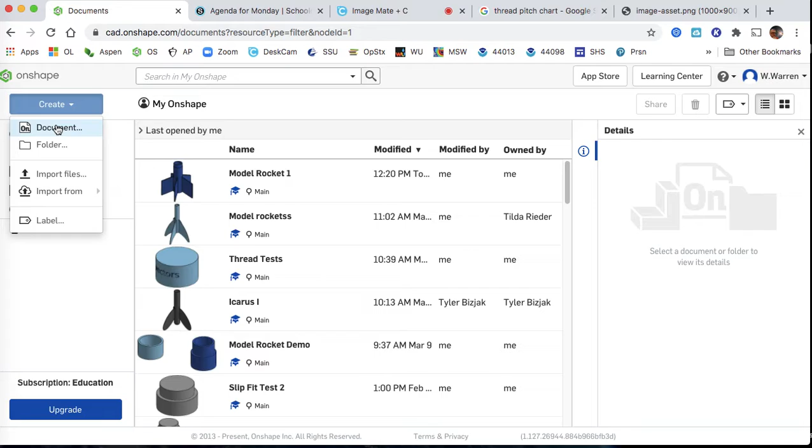Okay, so I'm going to call this nut and bolt. And I'm doing them really big because I really want to apply these threads to the inside of our rocket bodies so we can screw those motors into place. And I also want it to be big enough to print so I can check it. I just printed a really small one, and it was so small I'm not really convinced that the printer did a good job with the threads being so close together.

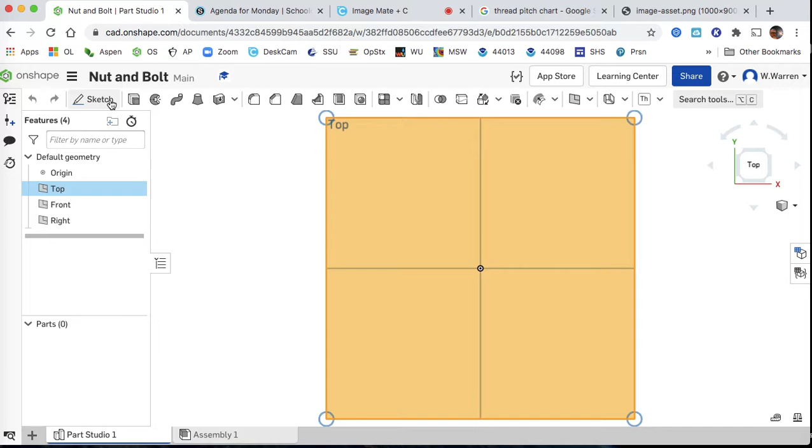Okay, so what do we do? Well, nuts and bolts, first and foremost, have tops that are hexagonal. They're 6-sided. So let's right off the bat start a sketch on our top plane and grab the inscribed polygon tool and draw a 6-sided polygon.

Now, our hole in the middle is going to be 1 inch. We better make this thing, gosh, why don't you just go ahead and make it 2 inches? Just make it nice and big, right? And oops, so get to 6 sides and click on it again. Grab your dimension tool, and from the top to the bottom, I want it to be 2 inches. Oh, I got pretty close by accident. 2. Okay. Now, there's our general shape.

Let's save that general shape, and let's extrude it. Let's see, it's 2 inches. I don't know, maybe I'll just come up 3/4 of an inch. I don't want to do a full inch. 1/2 inch. I'll do 3/4 of an inch. Extrude, I'll do an extrusion of 3/4 of an inch.

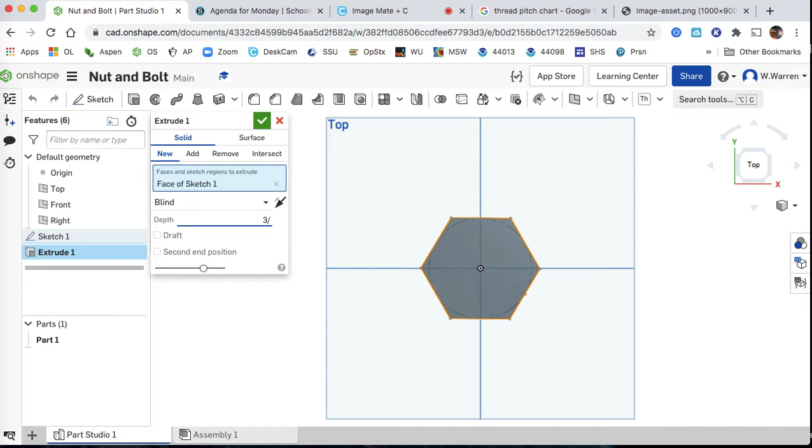And accept. Okay, there's the head of our bolt, right? And so, first and foremost, if you ever look closely at a bolt, they have this general shape, but they're not. They're all rounded at the edges because you don't want those corners cutting into stuff you screw into. Right, so let's take care of that by doing this.

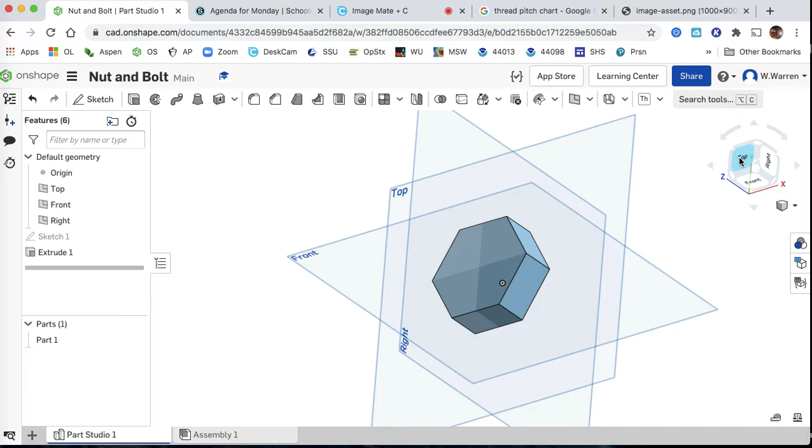Let's go sketch on this surface, and let's grab our circle tool, and let's do an inner circle. Just get it close to the outer diameter there, and then go to your tangent constraint and constrain that to be tangent with that. Make it the exact size. Okay, good. Another circle just has to be bigger than all the geometry, it doesn't really matter, just bigger, like that. And let's accept that.

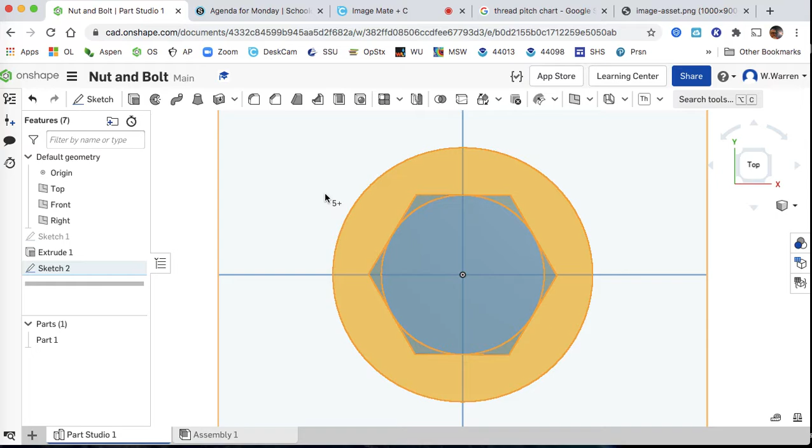Now watch this little trick here. If we zoom in and we select these areas, that little area, we can cut these at an angle. Just all these little funny shapes right here. And also choose the circle. Now watch this. You go to extrude and remove material.

You got to fiddle with it to get it right. Let's go to draft by some number of degrees. Like let's go 60. That's very common. Right? 60 degrees. I click outside of that so I can see what it looks like. It previews it for me. But if I do that cut now, it's going to cut 60 degrees in, and all I'm left with is that pyramidal shape there. So let's not do that.

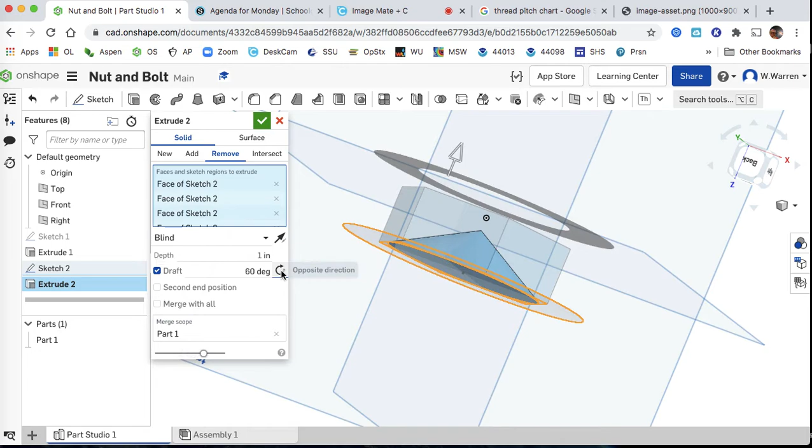Let's flip this around. That's what I'm after right there. See, I'm cutting at a 60-degree angle down across that face to the outer circle, to that distance, right? And the angle is 60 degrees. Right? So that's good. Boom.

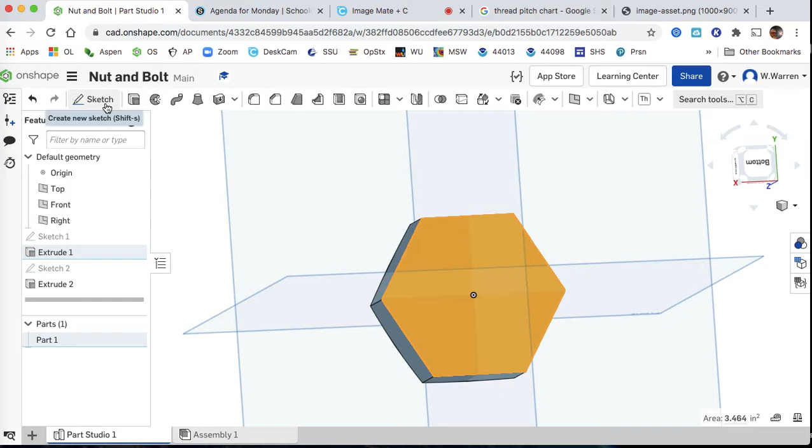We can then quickly do it to the other side too. Boom, sketch, look right at it. Let's see, circle tool, tangent to here, and then a bigger circle. Same thing. I'm doing the same thing, same exact thing on the other side, right? And I say that's okay.

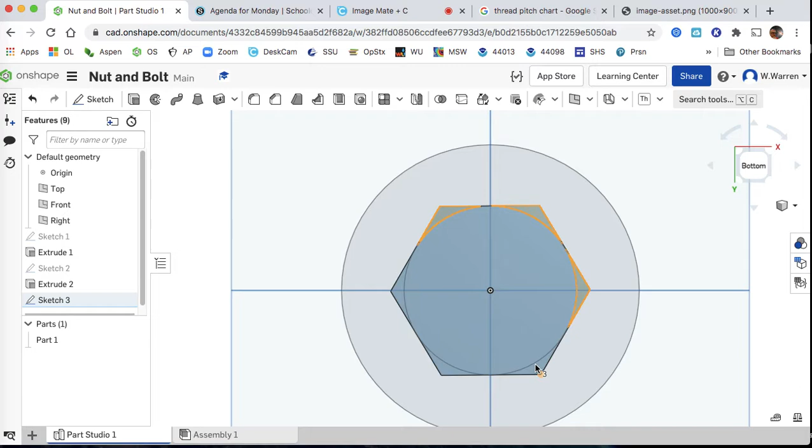And I select these interesting little shapes here. Select these interesting shapes. Oops, I got that line. That's not good. Get rid of that. Get that thing right there. Yes. There we go.

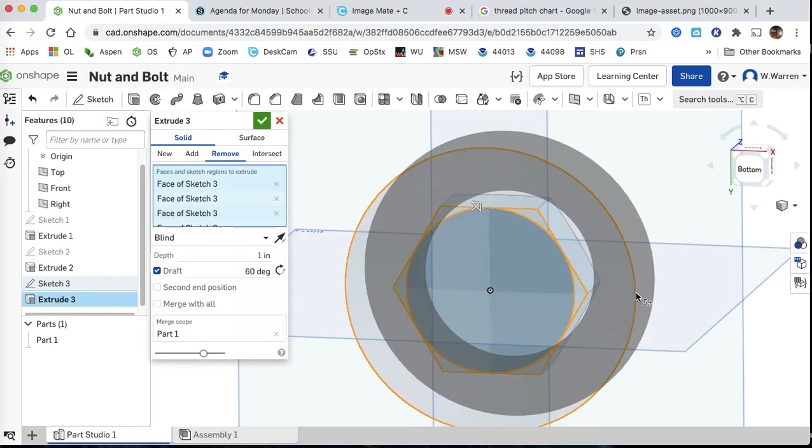Extrude all that, removing material. Doing a draft cut at 60 degrees. Clicking outside of that box so I can get a preview of it. Again, it's just going to cut the wrong way, so I'm going to flip the cut that way, and I'm done. So there's our head.

That, believe it or not, that's the hard part. Okay? Now, listen, you're all going to have to do this. I had to do it earlier. It's right there for me now. But you're going to have to go into add custom features. It's probably right up front of yours.

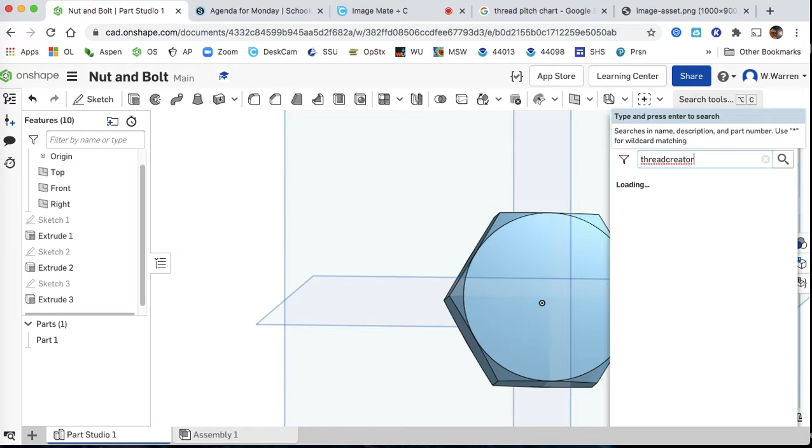Add custom features, choose it, and then search. Search up thread creator, one big word, search it up. And I chose this one here, thread creator. I'm not going to choose it again because I already have it installed, right? But choose this right here and it's going to show up in your toolbar. So thread creator, start, boom, choose that. I'd be curious to play with these different versions, V2 versus these starts. I just don't know what all these different things are.

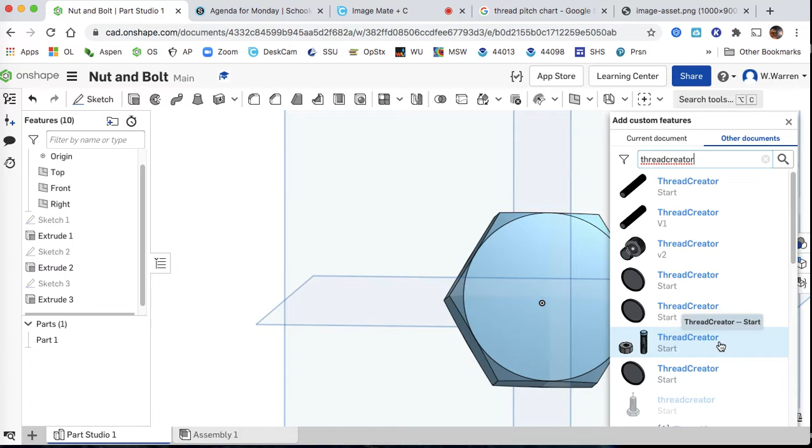Oh, V4 is in progress, I see. So they're working on that. I chose this first thread creator one, and it seems to work really well. So I did it already, so I'm just going to X out.

I've got it right here, thread creator. But before we get to that, please do that part. Now let's go to the bottom of this thing. I think we're 2 inches across here. We said we're going to do a 1 inch.

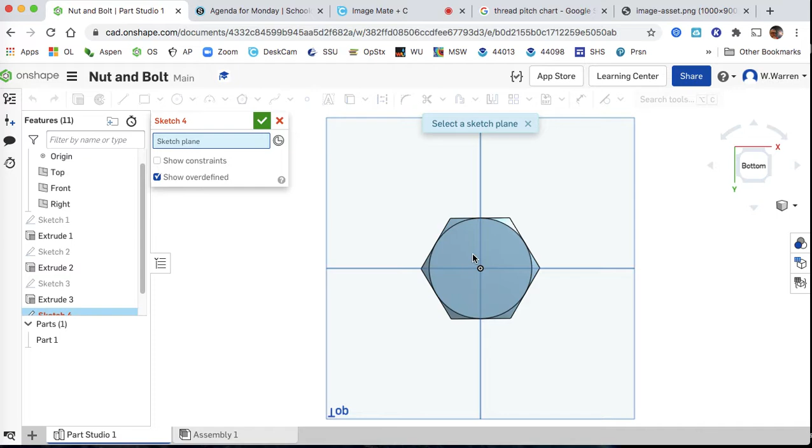Yeah, we said a 1 inch. So let's go ahead and sketch on this surface with a circle, and let's just go... I think 1 inch is what I said. Yeah, 1. Let's go 1 inch. And Shazam. And while we're at it, why don't we just extrude it 1 inch?

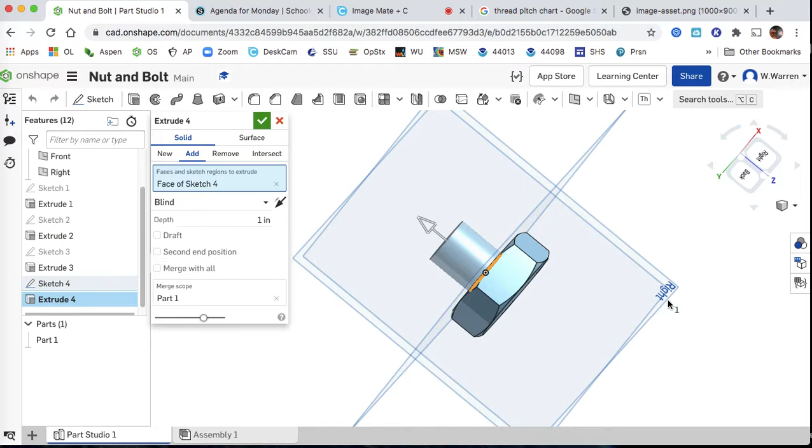Extrude, add material 1 inch. That seems a little short, huh? Let's go 2 inches. Okay, and accept that. That'll be better.

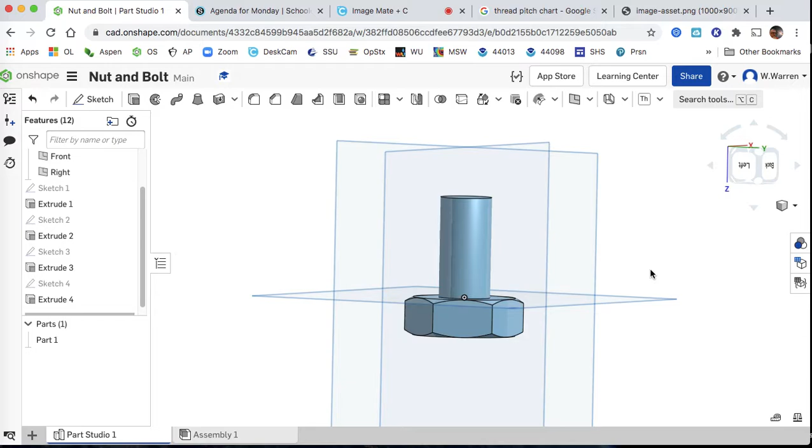So still kind of short and stubby, but that's okay. We're just really practicing with the threads. Let's accept that, so that looks good. I mean, ideally it'd probably be longer in reality to have a longer threaded shaft, but we're just playing with this to get the threads right. We're not actually going to use these bolts to bolt anything down. We're just getting our methods and approaches right to dealing with threads.

But now our methods and approaches are much easier because we just click on thread creator and you get this, right? And so this is the American standard. We'll go with that. You can also do metric, but let's just go with standard.

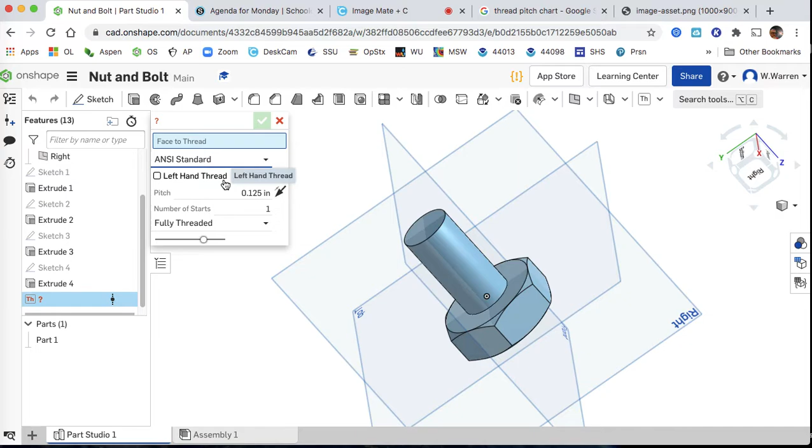What face do you want to thread? Well, that one, right? Number of starts, 1. Fully threaded, sure. Pitch, no, it's too tight. Let's go 1/8, right? That's what we said. We're going to do 8 threads per inch, so they're 1/8 of an inch each.

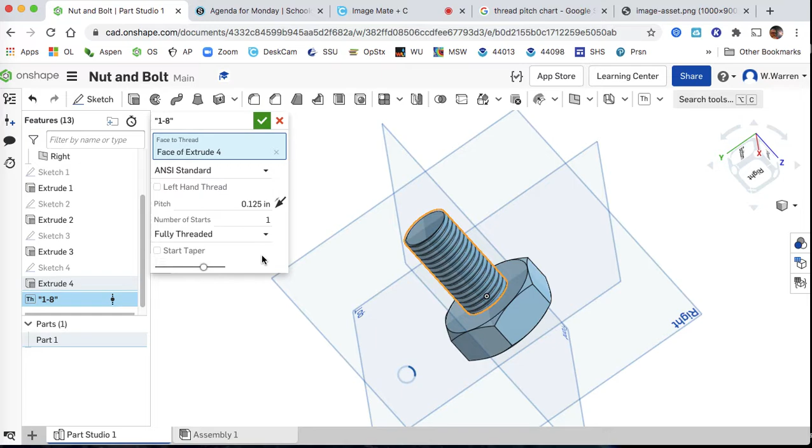I'm going to click outside of that, just see what it looks like. Oh, is that what it was, 0.125? I think it was already that 1/8. I guess that's 1/8 right there, right? So there's some threads. Guess what? The bolt, it's done.

Okay, well let's do a nut that will accept those threads, at least hopefully. You know, that's the theory, right? So here we go. I'm going to rename this while I'm here so I don't get confused. We all know that happens real easily.

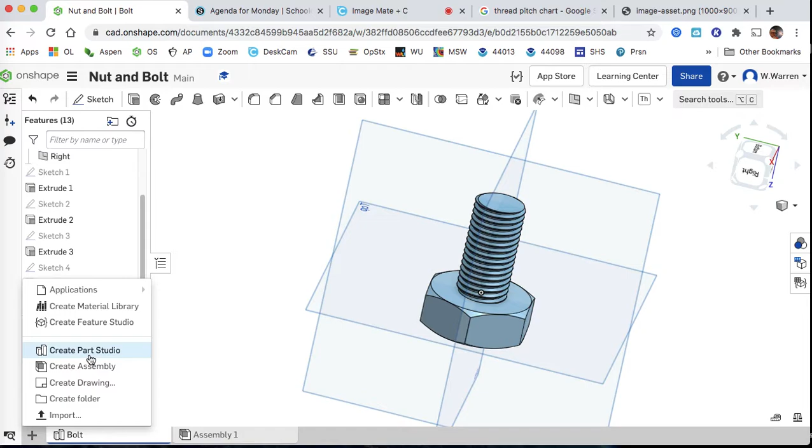Rename, I'm going to call this the bolt. Very good. I'm going to add a part studio. Right off the bat, I'm just going to call it the nut. Rename, the nut. Okay, guess what I'm going to do? Same exact start, so let's be quick about this. Top plane, sketch, inscribe polygon tool, 6 sides. Let's see, we were 2 inches across, so let's just go 6 sides.

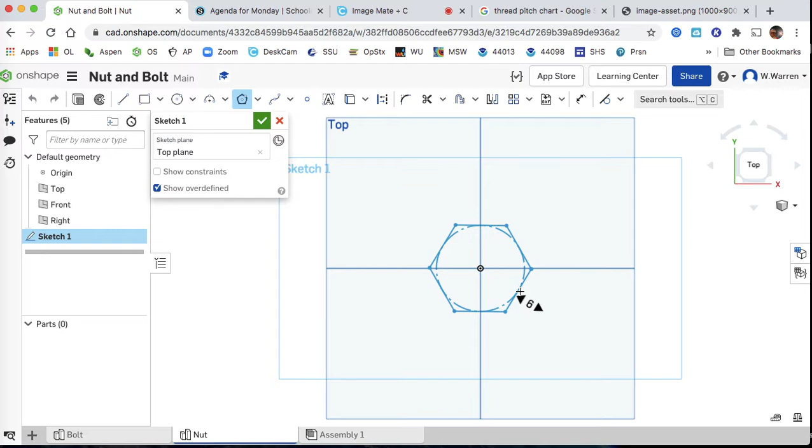And dimension tool is right here. From here to here, we're doing 2. There it is, and I will accept that. I will extrude it. I don't remember how much we extruded it. Was it 1/2 inch or 3/4? Doesn't really matter that much.

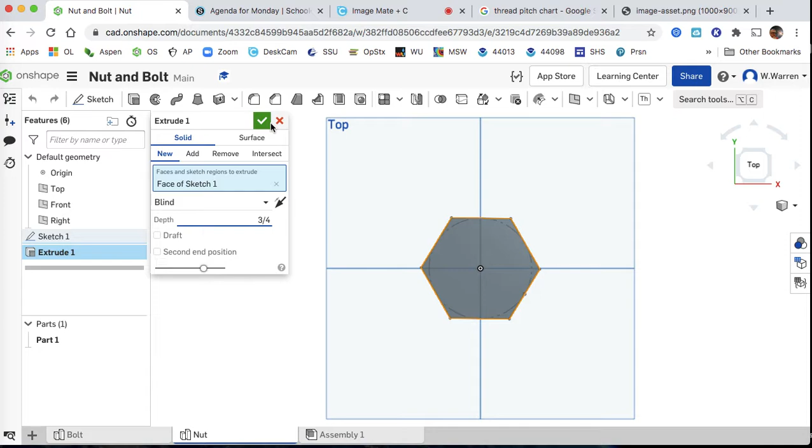Let's extrude that, and I think I did 3/4 of an inch, but it doesn't really matter if they're slightly different. Doesn't matter one bit, really. I'm going to extrude that by 3/4 of an inch. Looks kind of like a nut, but not quite.

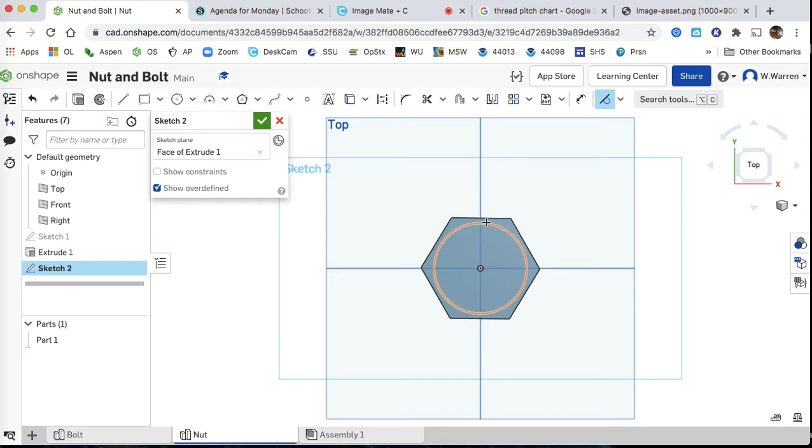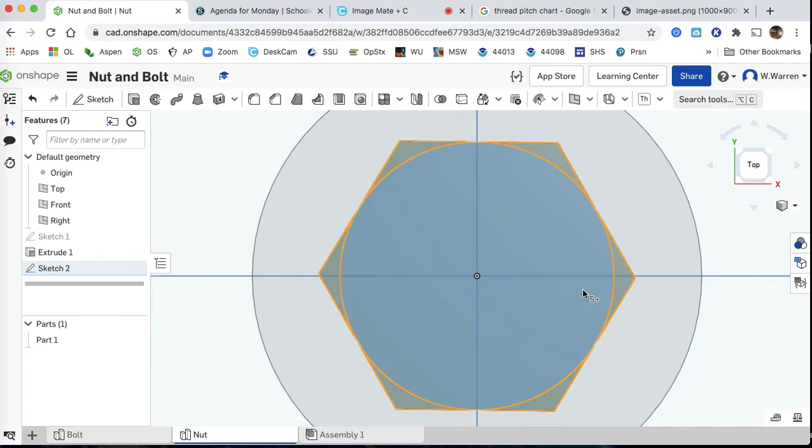So same idea here. We have to sketch on this face and grab our tool, our circle tool, go out, make a tangent to the edge there, and grab another one that's bigger, go to there, accept it, go in here and choose all these little regions that we want to cut. Make sure you're just getting these shapes here, not that inner circle, just that triangular top with the curved bottom there, just that. And then choose the outer one as well.

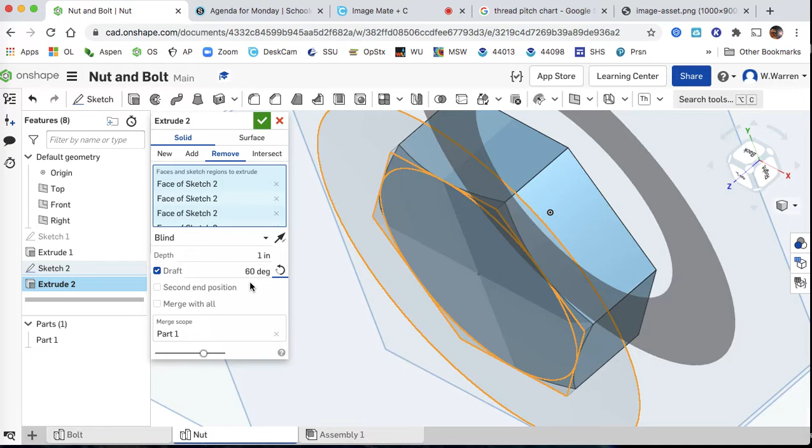Extrude that, let's remove material. Let's do a draft cut, 60 degrees. And I think we had to flip direction. Let's see if we got it right the first try this time. Yes, we did. Removing 60 degrees. Yeah, we're good.

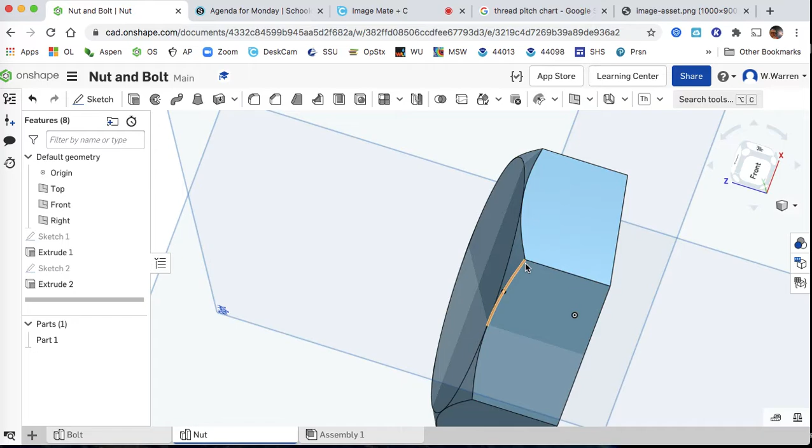See how we're cutting that? Otherwise, if this was a metal bolt or a nut and you're screwing it onto a surface, those corners would be interfering with the surface and scraping it up. But with them curved away, they're not.

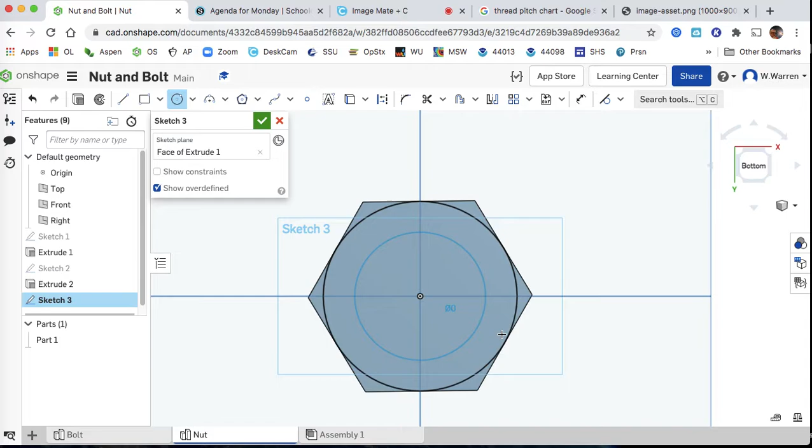So very quickly to the other side, same thing. Start a sketch on that side, that's the bottom, and a circle that's tangent first, here to here. And then a second circle that's bigger, by any arbitrary amount. Accept it. We'll go in and choose all those funny little shapes again. 1, 2.

The outer circle as well. Backing off, I'm going to extrude it and remove material.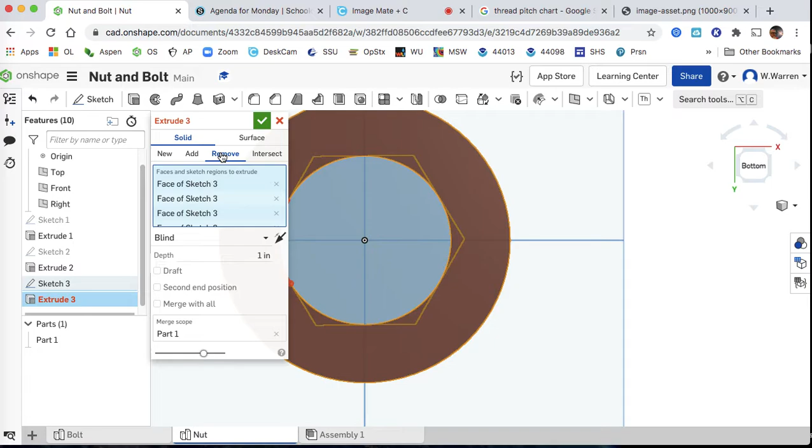I'm going to draft cut 60 degrees. This is the last time we have to do this, don't worry, 60. I'm getting used to this now, so I'm confident I got it right, I just did it a bunch of times. There it is, all right, so there's our...

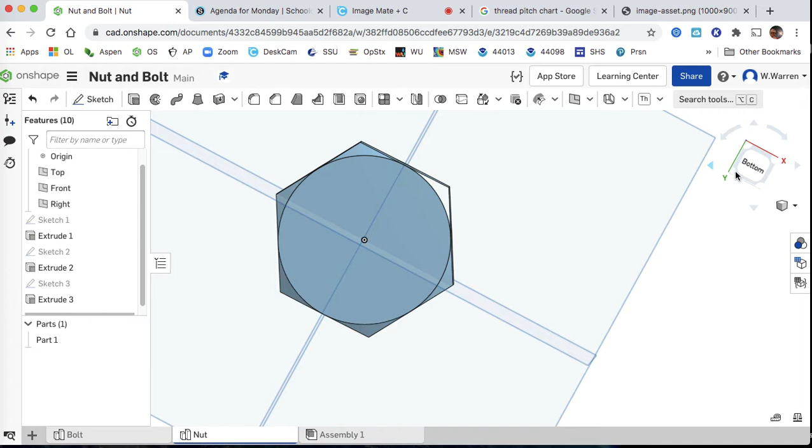Nut. Okay, let's look right at the bottom and think about this. We made a 1-inch hole in the bolt. Sorry, the bolt is 1 inch thick. So this hole has to be more than 1 inch, because otherwise it's way too tight of a fit.

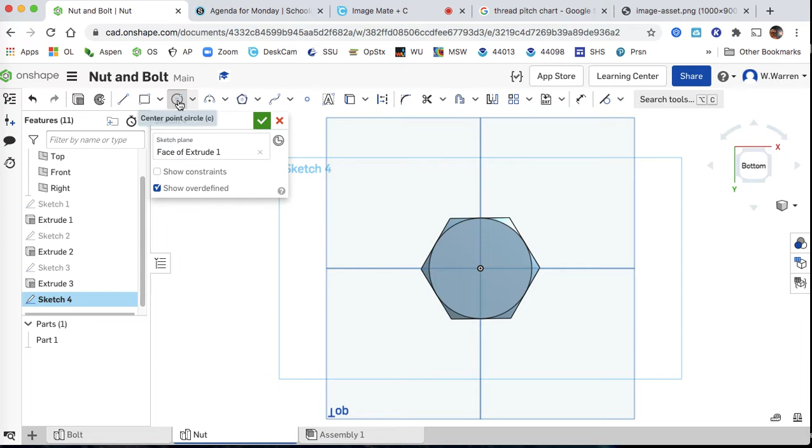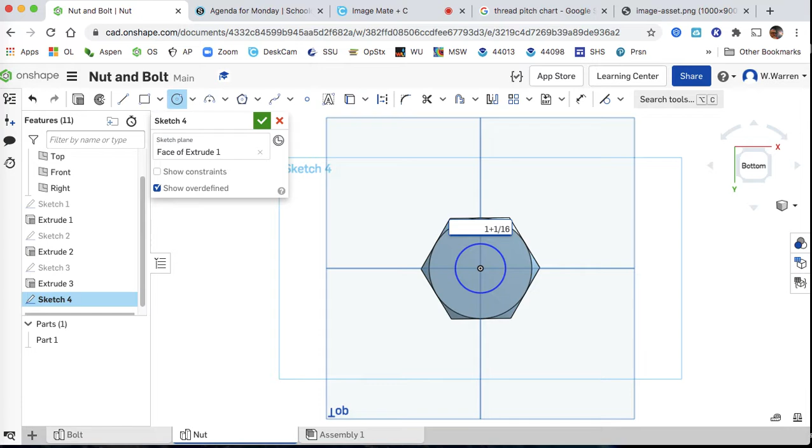So let's sketch on this face, and I'm going to just draw a circle, and I'm going to do 1 inch plus... what do you think, a 16th? So 1 plus 1/16, that's a 16th of an inch bigger than the threaded bolt that's going to come into it. So let's go with that, 1/16 of an inch bigger, and let's just choose it and cut it.

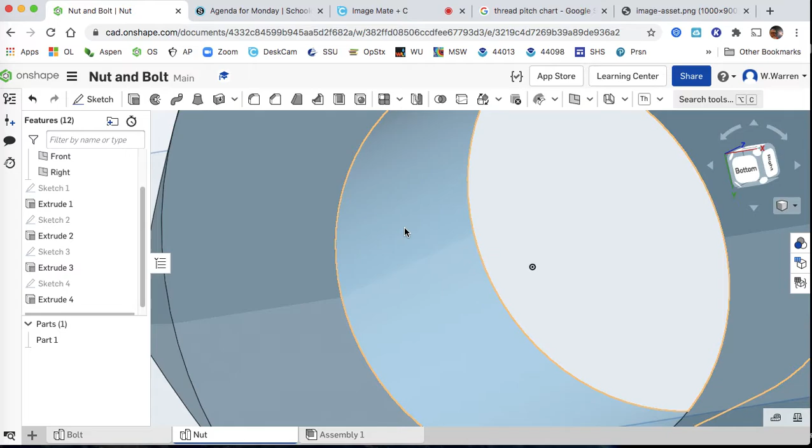Remove material. 1 inch will certainly do it, right? Because it's only 3/4 thick. And accept that. All we have to do now is go in and put the same threads there that we did with the other. So let's open up the thread modeler.

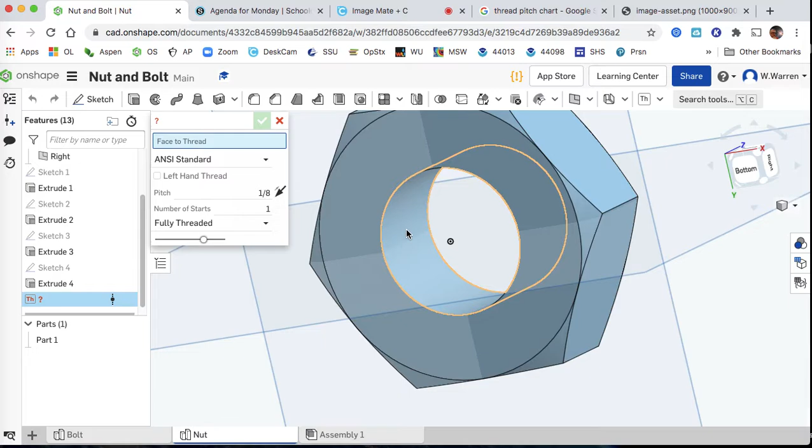Pitch, 1/8, fully threaded, yes, yes, and yes. What face do you want to thread? That was the 1/8, right? That is 1/8, I just want to make sure because that was the other one, but I'm almost sure that was right. And then what face do you want to do? That face. And yes, that was right, 0.125.

And there it is. Okay, so now we have a nut that will supposedly go right onto that bolt we created. And where have I applied this elsewhere?

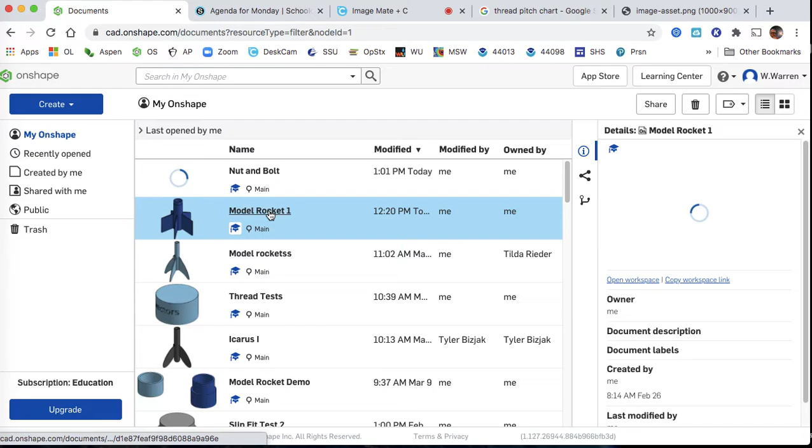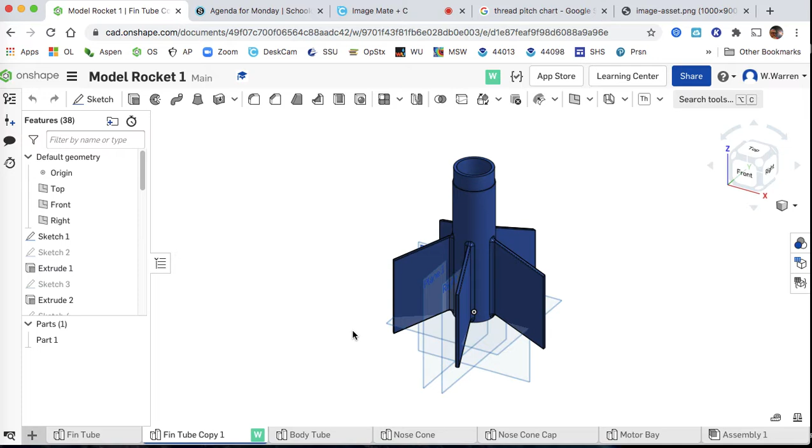Well, I went over to my rocket, one of my early rockets I was fiddling with, this fin tube. I went in here and created a copy of my fin tube. I was in my fin tube, I hit create. If you're in here and right click, you can hit duplicate, which is what I did, and then this showed up. So now I can mess around with reckless abandon with this one, and if something bad goes wrong, I can just trash it and try again. But I just came in here and put threads right there, right?

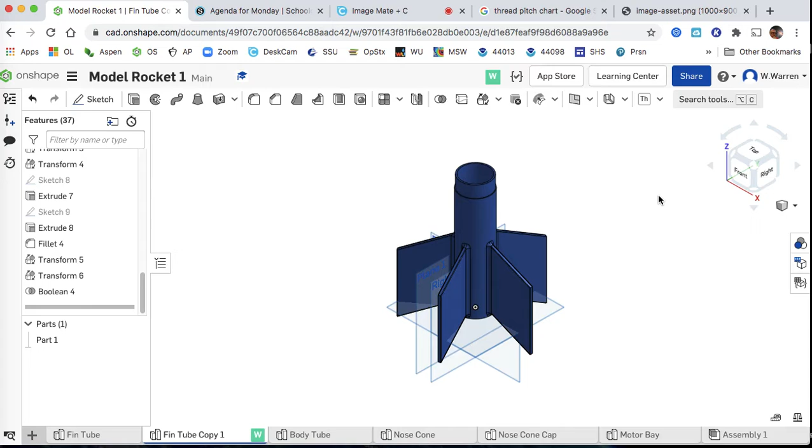So let me show you what I just did. Let me just delete that, delete those threads. So when I made my copy, it looked just like this. And I went up to Thread Tool. Well, first I looked at it, right? I looked right at it, and went up to my threading tool, and just chose the pitch.

1 millimeter, that's really small. I want these to be nice, big, fat, coarse threads, where just one rotation, or even a quarter or a half turn, it goes in nicely. So nice pitch, also just be easier to print. So I didn't do 1 millimeter, that's the distance between the peaks - I did a 3 millimeter pitch, and so I just went like this.

I'm just playing, I'm going to mess around with these and get some numbers. But what face do you want to put that on? Oh, fully threaded - no, I don't want it to go all the way up the tube, I just want to go, gosh I don't know, distance, 25, 35 millimeters. Sure, why don't we go 35 millimeters? That doesn't say 35, does it? 35 millimeters, number of starts, distance, the face.

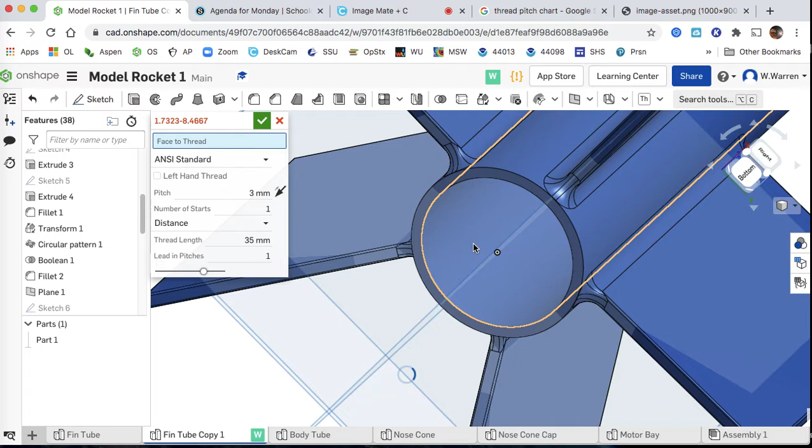What face? That face. And hopefully it'll show up - it did last time, there they are. I feel like I went up farther this time, I might not have gone to 35 last time, maybe I went 25 - 25 looks a little bit different.

Thread length, 25 millimeters, let's see what that looks like. If you click outside of that box, it'll preview it for you. So there it goes, doing the hard work for us. That's more what I had last time, but there's some threads, and if you take a nice close look - let's accept that.

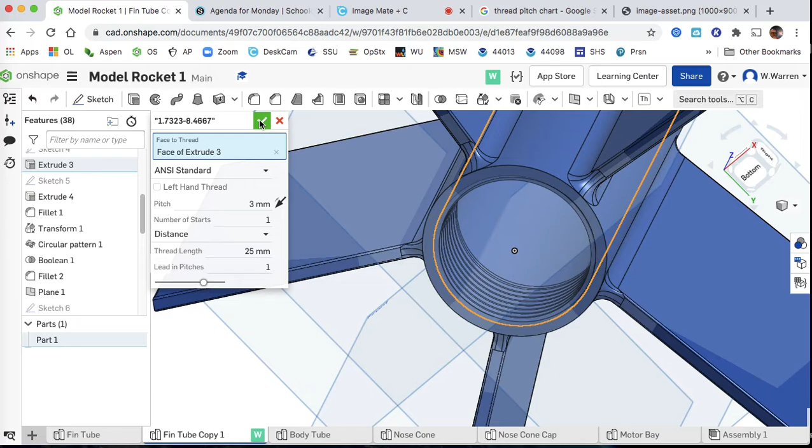Now, I don't think it'd be much of a stretch. If these threads are actually cut decently and as stated, then I don't think it's going to be much - you can see where it starts right here. I don't think it's going to be much of a push to create a part that screws into there with a big hole in the middle for the engine. I think that's going to be pretty straightforward if we can just get the threads to interact well.

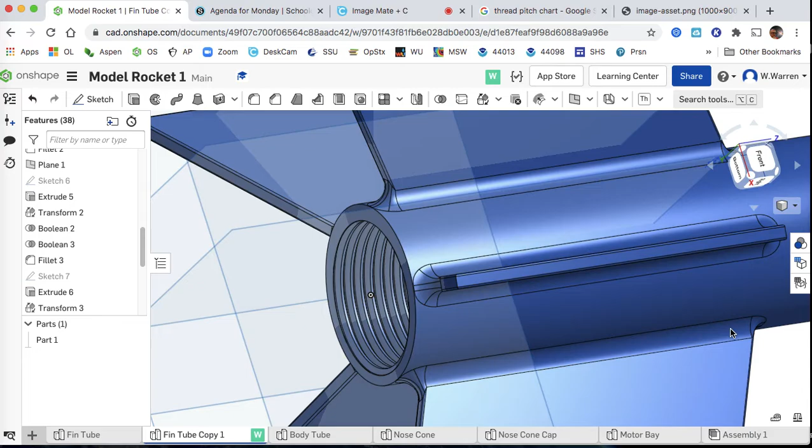Now, we've got to deal with the tolerances and the clearances, but once we get that down, I think we're pretty much going to be there, and we should be printing these things up any day now, any day now.